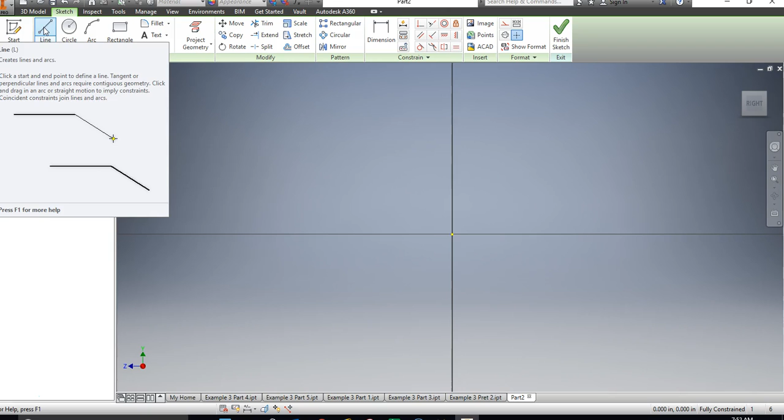I'm going to use the line function for this, and make the general shape. I'm not going to worry too much about getting the exact measurements, just the general shape, and then I'll dimension it afterwards. So we know our shape is that C shape we saw a moment ago. Let's see if we can find it here. So it's this one. We're going to make this shape right here.

So let's see if we can do that. We'll go line, and I'll click once. Once the green dot shows up in that origin, I'll click once there. I'll move up, and note that I'll want it to be 90 degrees on the right there, and keep that, but I don't really worry too much about the height. I know it's got to be around 1.5 inches, so I'll get to about there.

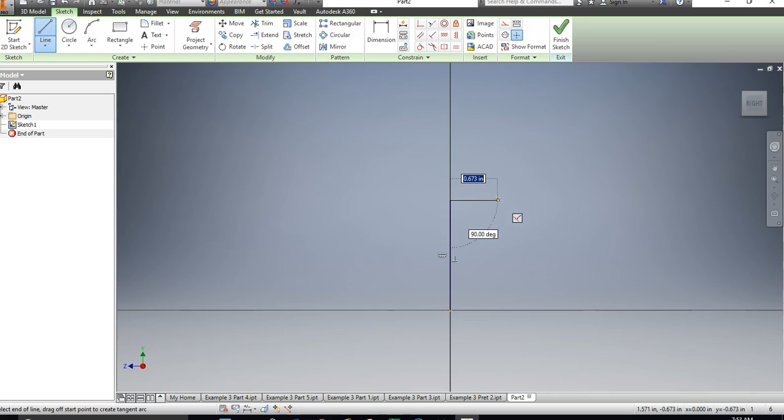I'll probably want to zoom in a little bit. There we go. Around 1.5, but I'm not too worried about it. What I don't want to do is be off to the side on either side. I want to make sure that I'm straight up and down. All right, click once, and then I'll move over to the right. I know I need it to be around 0.75, but once again I'm not going to worry too much. What I am going to worry about is that angle being 90 degrees.

So we'll make sure that's right, click again, and go down, and so forth. All I have to be is in the general ballpark here. I'm going to dimension it later, and since I really haven't set any dimensions, I'm going to be careful on this one. This is telling me I'm going to lock into that.

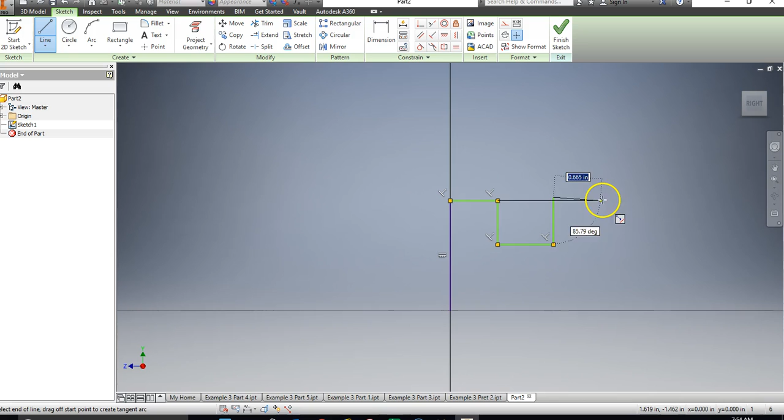I might just be a little bit above it for now and not worry about it. I don't want it to do its automatic setups, so I'm just going to do this, and then over here, and then down to here. I will let it lock to the line there. Boom, here, and over back to the beginning. Let it lock on. Boom.

Now, anywhere there's a green line is not good generally. That means I haven't completely constrained it, I haven't told the computer all the things I want it to do. So this is where I go to the dimension tool right here, and I click that, and I start dimensioning.

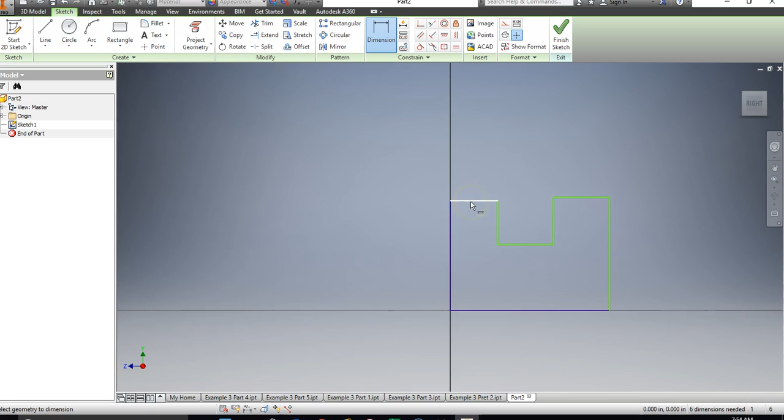So I want this line to be a certain length, so I click once, bring up my mouse, and then click again on the number, and I want it to be 0.75. I hit enter. All right, took care of that, and then I go to this line. I want it to be 0.75. And likewise for this one.

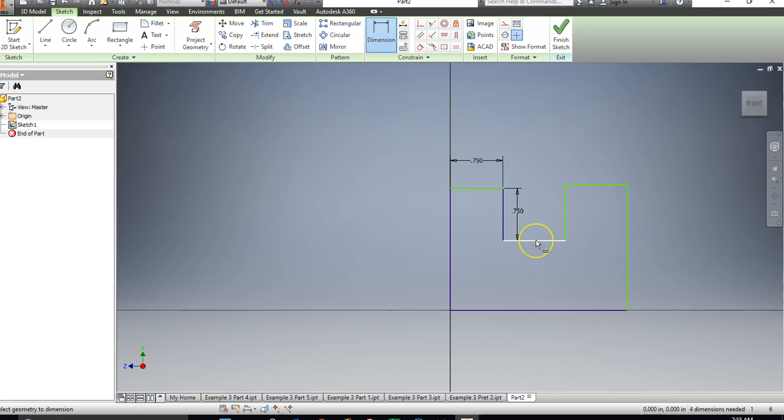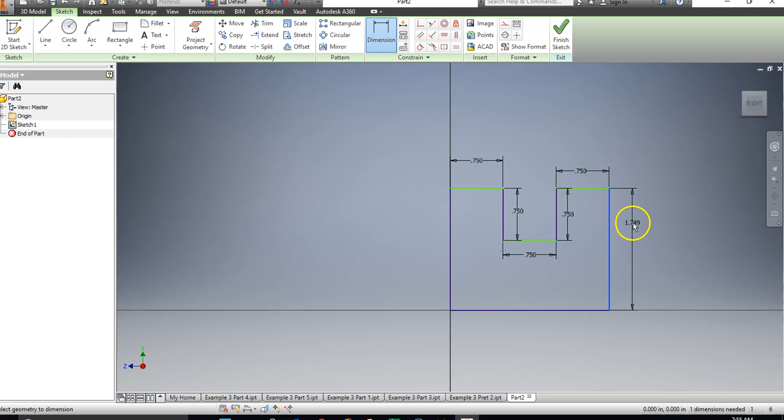While we're at it, I'll just go around and give all the dimensions that I want. In this case, there's a lot of 0.75s. This one's a 1.5. Once everything is blue, I'm done. Everything is constrained, so for example I don't have to go down here and do this one, because by telling this, this, and this are all 0.75, this will automatically, as we'll see, be 2.25.

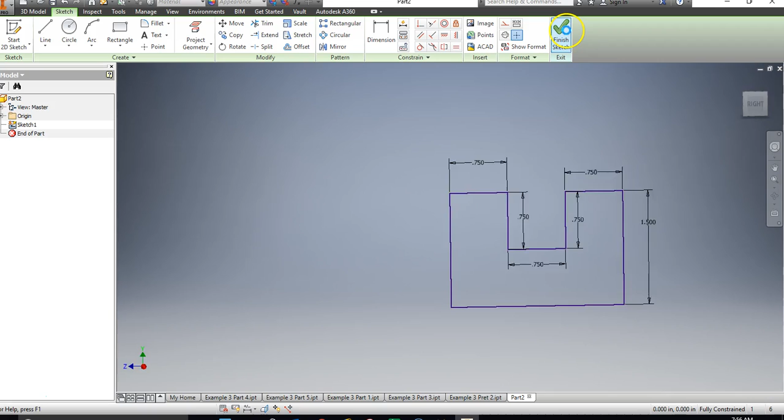So I finished my sketch. Now the advantage of doing it this way is once I've done that, when I extrude, I'll be done. So I'll right-click it, extrude. I want to go 0.75 to make the right thickness, hit enter, and I've made my shape.

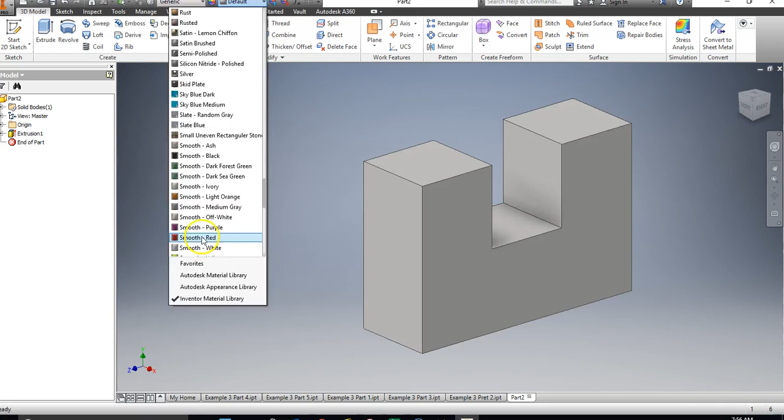I'm going to make it red like we saw, so remember I'm going to default, and let's see, I can go light red. What is smooth? Smooth red, that's what that looks like. There we go. And I will save it.

Now in my case I've already have it done once, but then I would go in and I would save it to your flash drive. Make sure you use your name and all that, and then you're good to go.